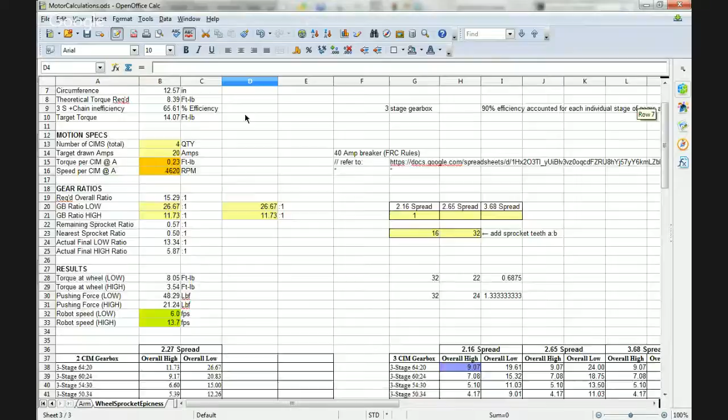Recreate this over the summer, but just for this demonstration I will use these numbers. I'm scanning through all of these so you can see what equations I have set up, and you're going to want these too. This is some more numbers that I had filled out before. So you can recreate this spreadsheet now, fix it, and use it for yourself.

Now, there was a big error that I had not noticed in the last part, which was these torque per CIMs at the amperage. That's what we use motor curves for. The more current we put inside the motor, the stronger it's going to be, and it's going to change how our motor behaves.

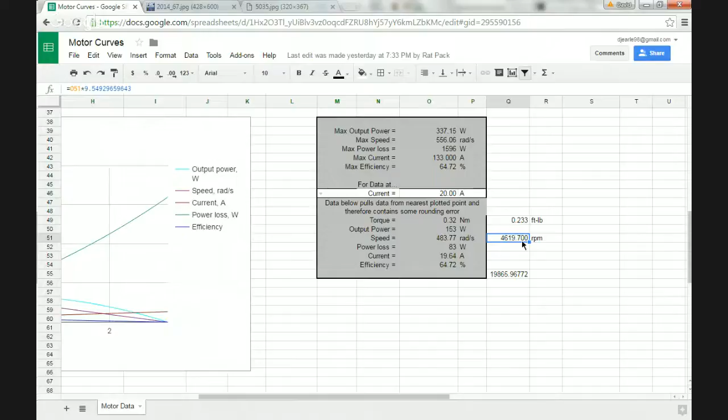We don't have to read directly from that graph though - this is computer generated, so we can get an estimate. So if we put 20 amps into one single CIM motor, we'll get 0.32 Newton meters out, or 0.233 foot-pounds, at 4619 RPM. So I took those two numbers at 20 amps and 12 volts, and plugged them in here - 0.23, 4620 - and that shaped our speed and torque, which should help shape this final number.

Now the other thing, give and take, is figuring out the sprocket ratios, the gear ratios and everything. These spreads are the difference in shifting between low gear and high gear - the ratio between low gear and high gear. So if we use this 2.16 spread, high gear will go 2.16 times faster than low gear.

However, these spreads are different depending on what gearbox you use. Let me go back to Vex Robotics. I don't have that tab up anymore. I just want to show you what I mean.

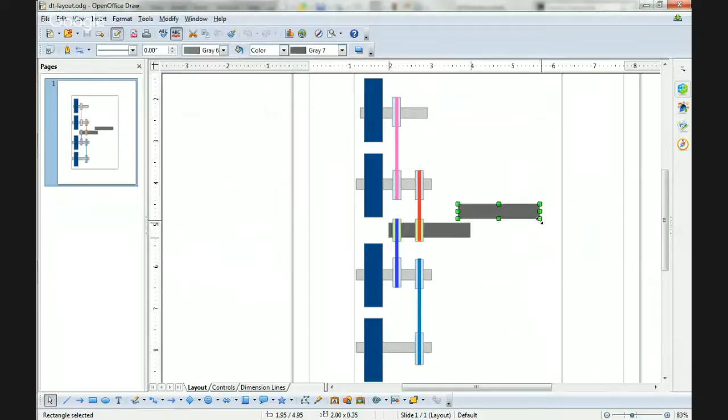These blue ones here are wheels. This dark gray one is the output shaft, which is what the motors are turning. The gearbox is behind this, powering that shaft, so you can imagine that as being the gearbox. That's where all the power is being converted from the motors. It's being slowed down significantly here, spit out at this shaft, and then slowed down even more between these yellow sprockets and these blue sprockets.

Now, small to big means each one of these wheels are going to be spinning slower than this, which means we get more torque, less speed, which is good for pushing. And we're already going freaky fast because our CIM setup is insane.

Each one of these lines represents chain, and you can see this layout needs to be very carefully thought through. Just as a side note, this is only half the robot. There would be this exact same thing mirrored on the other side, of course, so that we could actually go forward and turn.

Anyway, we have to very carefully understand how we're going to lay out these sprockets. This is a very standard way of doing it, putting 2 sprockets on the output shaft of your gearbox, running one to the right, one to the left, and then kind of daisy chaining this wheel to that wheel. So this wheel is driven by that, which is driven by this, which also drives this, which also drives that.

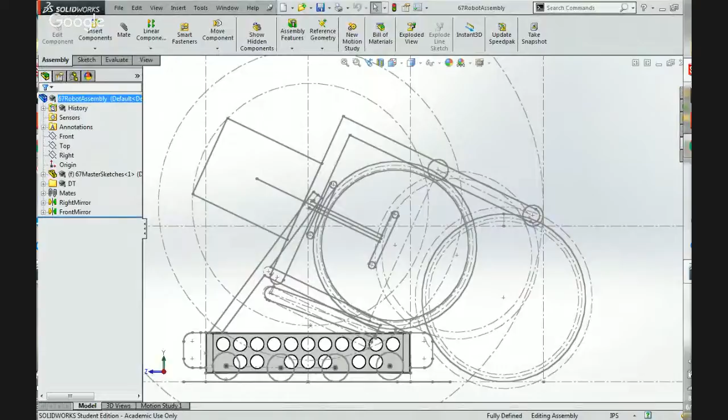So let's CAD this arrangement with these numbers, with this hardware and these sprockets. Let's put all of that inside our robot here. We've already laid out where the wheels are going to go, which is a good thing. So let's go ahead and download the CAD models for the wheels. We could CAD every single one of the components that we're going to use.

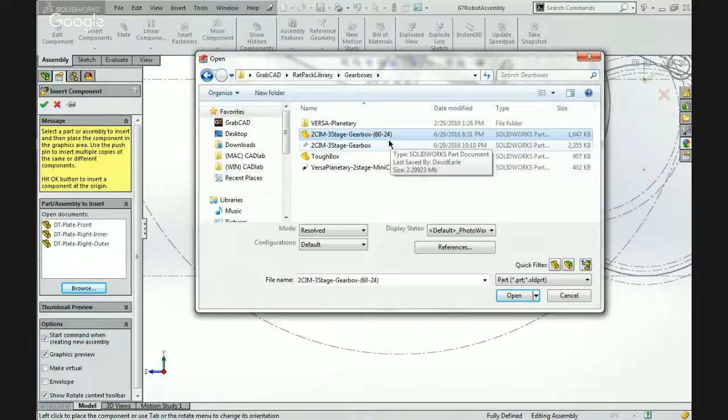We have specified the 3-stage version, the 6024. So we would download that STEP file. I've already done so, and it's already inside the GrabCAD CAD library, RatPack library. So what I will do is I'm just going to insert an existing component. I'm going to browse inside our RatPack library for a gearbox that is this 6024 2-CIM gearbox, 3-stage. Actually, hold on a second.

Simplicity-wise, that one was added in error. This gearbox is just the generic. The previous one had a specific gear ratio, and all the other parts were deleted. But this has every single gear stage. Let me just open this up so you can see what I'm talking about.

Here it is. If you download a CAD model and it comes in an assembly, you can save it as a part, and then it'll convert all of these into, instead of having them be parts, just individual surfaces, which is very, very nice. It lets you take a complex assembly and refer to it as just a part. Okay.

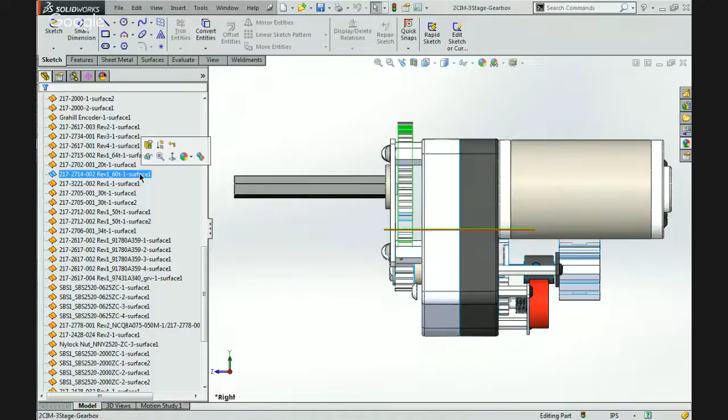So what you'll notice is that there are gears inside of gears here. So if I hide this gear, oh goodness. Oh, they were hidden before. But there are gears inside of gears. It's not like that mechanically in the actual model, but it lets us swap out the gear ratios inside the CAD model and custom tune it to whatever assembly we're using.

So currently this is the 20 tooth and the 64 tooth. And that's that. So you can swap out what gears you want to use. For instance, if you wanted the 34, you can show the 34 tooth, and it will pop it in your CAD model, and you don't have to change anything. This lets you make your assembly have greater detail. But I'm happy with this.

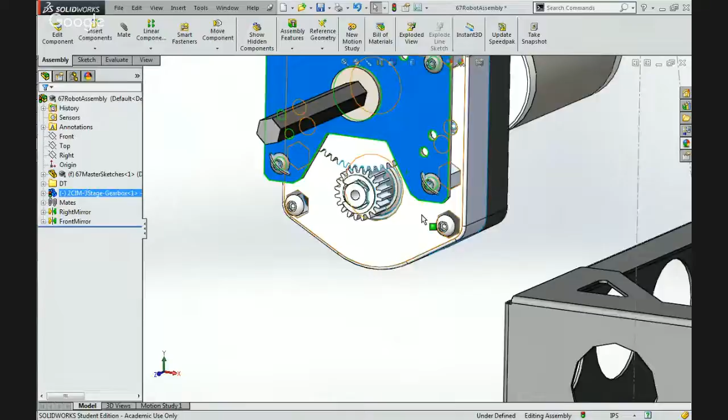These also come with a bracket down here. I've hidden the bracket. The bracket is used for mounting it to a flat surface, but we have a frame plate that we're using, and we're going to mount this front face directly to the frame plate, so those things will be coincident.

Then, for simplicity's sake, we're going to take the right plane of this assembly and mate that to the front plane of our robot. That way it's centered, forward and backward. And then the next thing is determining the height. How high do we want this to be?

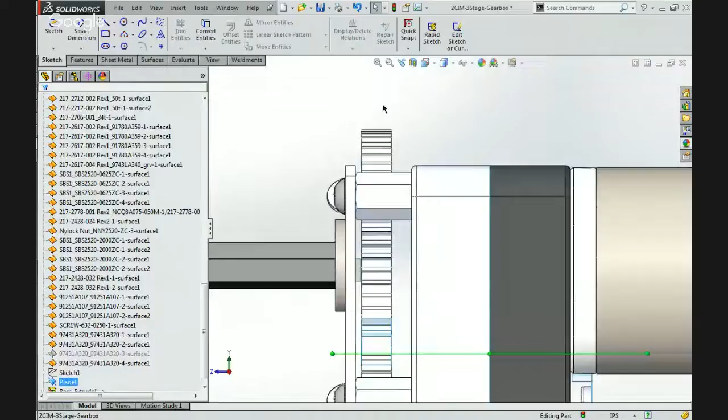So for that, I have constructed a plane that goes between the highest point of the, let me open the part so you can see how I defined it. So this plane goes through the center of the part from this tippy top point of the gear to this very bottom tangent part. All I did was make a sketch of a line from the highest point to the lowest point, made those coincident, added a midpoint, and then added a reference geometry plane.

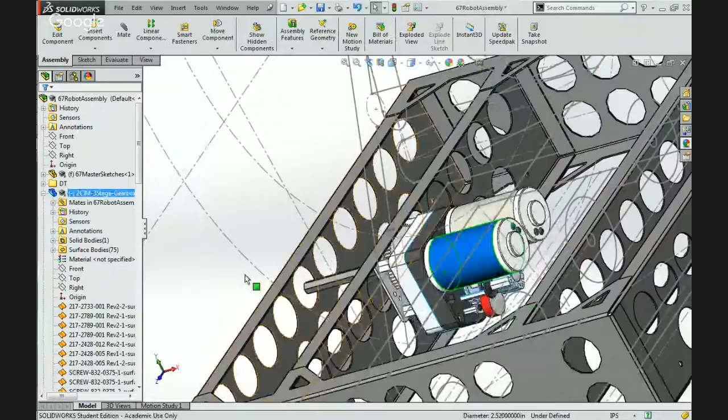Went to features, reference geometry, plane, and I added this, which takes the top plane, makes it parallel and coincident to that midpoint, and places a plane right through the center of our part. And so I can use that to locate it up and down. So I'll take that new plane that I created. Oops, that was a sketch. New plane, and the top plane of one of these parts. I want to do it to this one.

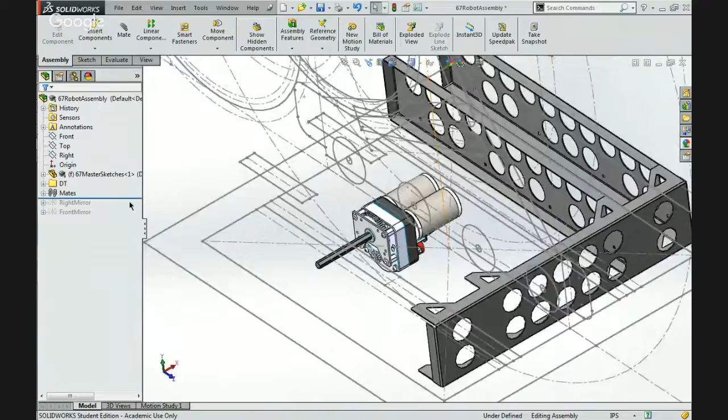Now, I did something a little bit silly: I took this gearbox and mated it to the mirrored side. It's best practice, as long as it's going to be symmetrical in the end, to mate all new components to a dominant side of the robot. That way you don't have components floating in space on the left. It's harder as the assemblies get more complicated. This makes your life much, much easier.

So since I already mated this fully in place, it's already fully defined, I'm just going to modify some of the mates that I added. For instance, this is no longer going to be true. It's not actually going to be mated to that face. It's going to be mated to this face, like that. If I flip the alignment, that's not doing any favors.

I'm gonna... I'll explain why you saw that shaft extrude extremely far. That's an odd behavior, and I'll show you how that happened. Parallel. I'm gonna flip this parallel. Whoops. Whoa, that was not my intention. Undid that. I think I did. There we go. That's better.

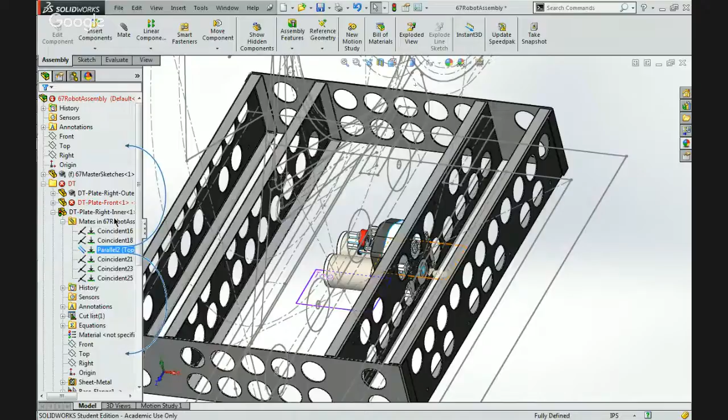Or is it not better? Did I mess it up or not? Okay, yeah, it's back now. Very good. It's this. Yeah, by doing that, I think I actually broke something. Or is it fine? I'm rebuilding. Oh yeah, that's fine. I just needed to rebuild the document. That constraint, this constraint, and that constraint.

So this one I'm going to flip. Nope. I tried that before, just in a different spot. What if I flip this one? There we go. That did what I wanted. So now the shaft, this is where the shaft comes out. It will be there.

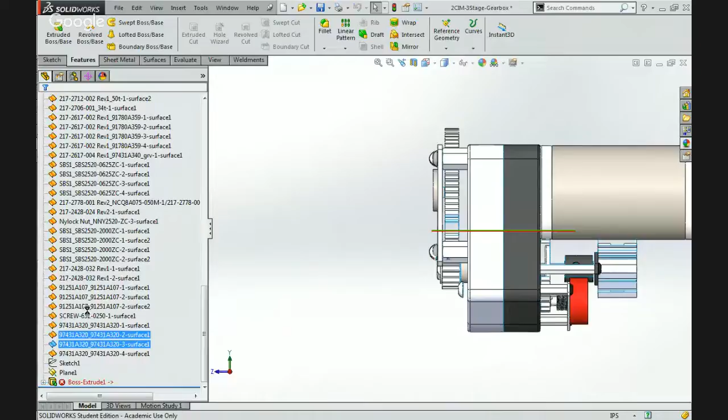Now, what I did, you know what? This is a part that I've worked with before. So what I'm going to do is I'm going to, oh, I can't. I deleted it. Okay, never mind. I thought I could show you something, but I can't. So we're going to do blind, and so this has a shaft that is somewhere around this length, right? It's a hex shaft, and it looks like that. It's actually significantly longer. I don't remember how long it is.

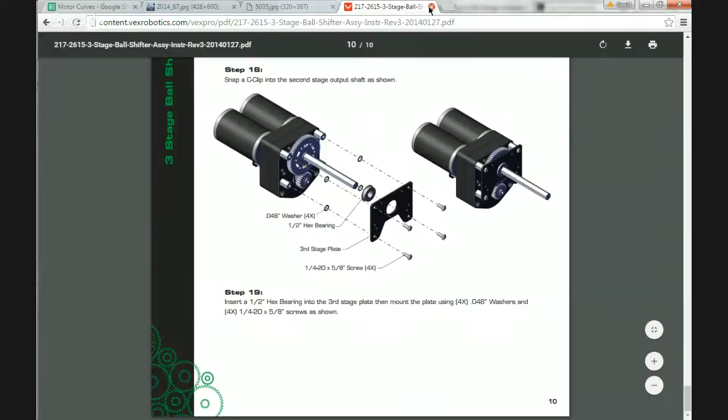Let's just take a look in the model. The model comes with a shaft already inside of it. If you get the long shaft, which is what we're going for, maybe if we do... I want to know how long the shaft is so I can put it in the CAD model. Well, I don't think they tell you here. This is just assembly. Well, the shaft is long. Not quite that long. That long. All right. That's just for representation purposes for now.

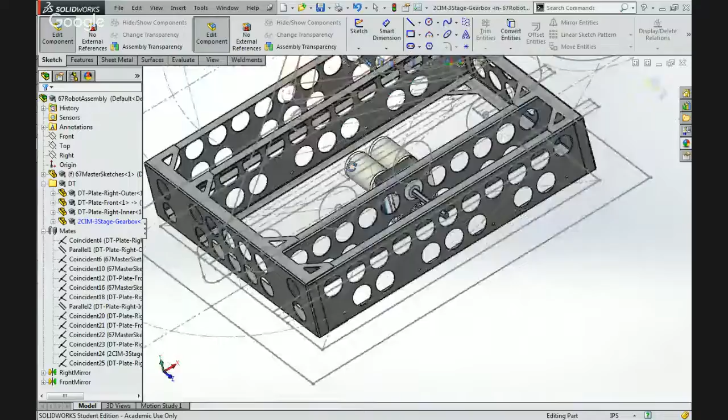Great. So we've got lots of space here, plenty of space for a wheel. It's actually somewhere around here, I think. I think it's 5 inches long, now that I see it in the context of a robot. Very good. So let's take on the next part of our drivetrain. And the next part of the drivetrain is going to be figuring out these wheels. I'm going to show you a really cool trick. It looks like we're going to have to create 3 different arrangements of wheels.

What we're going to end up doing is we're going to create a subassembly. We're going to create a new assembly, insert a wheel, insert a shaft, insert these bearings, I'm sorry, these sprockets. And we could make this one subassembly, and then this is the same subassembly as this one. This is different than this, right? It doesn't have this extra one. So we could save this assembly as and delete this part and then insert it.

Or there's a better way of doing it, and it's called configurations, where you can use one assembly like this and turn on and off components in specific instances in a major assembly. If you didn't follow that, don't worry about it. We're going to take a look. We're going to create it so you can really see. You'll get a sense for it once we start working with it.

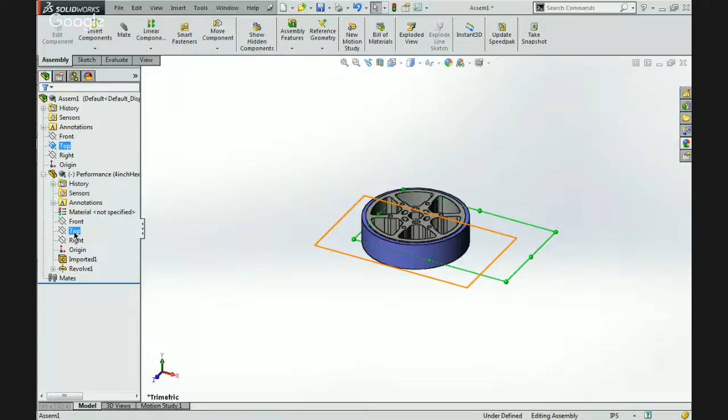I see that this is like laying down on the table, as if the top plane's the tabletop surface. I like to orient this always as if it's on the robot already. So what I'm going to do is I'm going to lean it up. I'm going to take the top plane and make it to the right plane so it stands it up. I think this is going to be flipped. I'm not entirely sure. And then top plane on the right plane, maybe. Flatten that out. And then lastly, front plane on. Front planes are shared. So there you go. You can see how that wheel's in there. It's important to note if you download a new one of these wheels, it doesn't come with this tread.

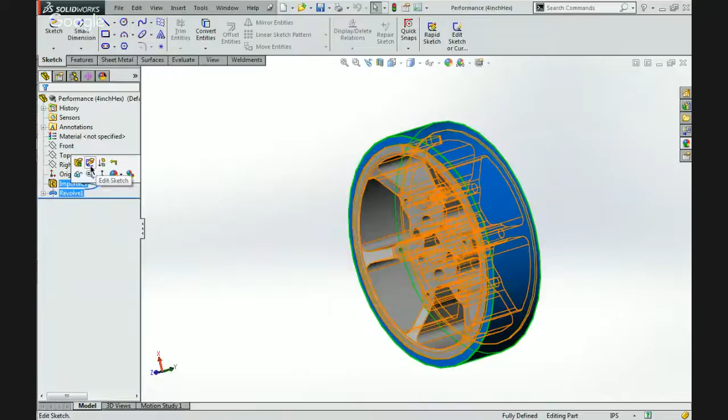A really cool thing that you can do with newly downloaded models, this is what you'll see in a downloaded model: you can actually add your own geometry to the model. So you can always add to it. We'll cover that.

What I would do here is add the tread, because currently the outer rim diameter is 3.6 inches. The tread makes this a 4-inch wheel. It doesn't get to 4 inches until you add the tread. So I did a revolve extrude on a sketch that was on the right plane, and the sketch is of a rectangle that looks like the silhouette of the tread. It's 0.2 inches thick, and it's revolving around that line. It just revolves all the way around.

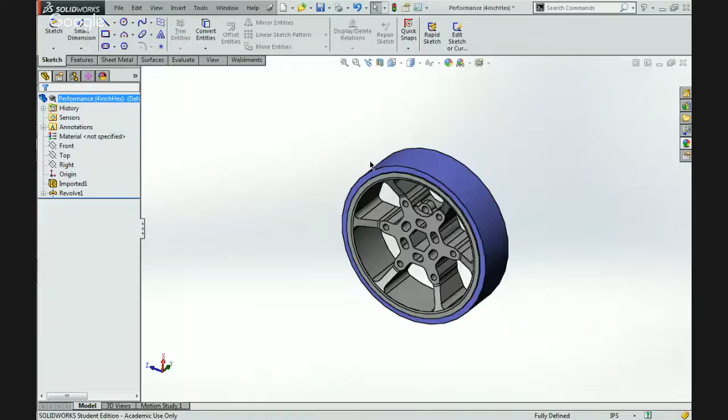You're taking that one rectangle and sweeping it across the entire thing and adding material as you go. And now you can see the outer diameter of this wheel is indeed 4 inches, just like we had intended. So we'll go back to our subassembly here. Let's add some more parts.

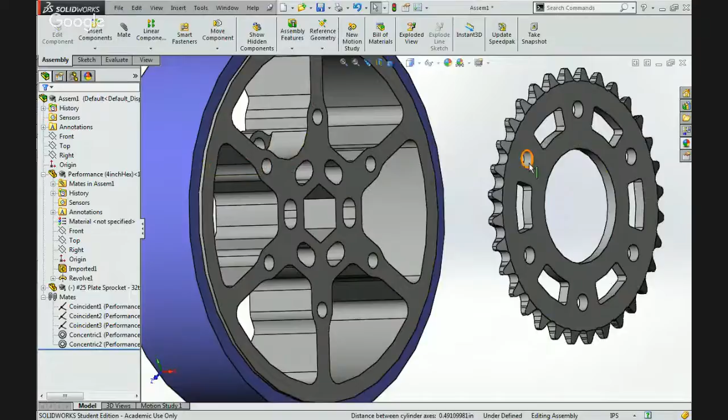Now, we're going to make that concentric so that this is centered on the wheel. We're going to lock the rotation by making one of these holes concentric with one of those holes. And you can see we can set it as close as we want to the wheel itself. But we don't want to get too close because chain has thickness. Let's figure out how thick the chain actually is.

Just as a good resource for you, McMaster-Carr has fantastic documentation on a whole bunch of mechanical solutions. You can just see all of the things that they have. It's almost endless. But if you don't know what something is called and you're just trying to figure something out, this is a great place to browse through their library, and you can find things really fast. Anyway, we're looking for roller chain.

25 roller chain. We're only working with speed, not too much with torque in this game, so we're probably not going to be popping any 25 chain anytime soon. If we were really in big push matches, we could upgrade it to a 35 chain. But you can see here with 25 chain, McMaster has a SolidWorks document that you can download of these few chain lengths, and you can get critical dimensions, like the width of the chain from pin end to pin end is 0.3 inches.

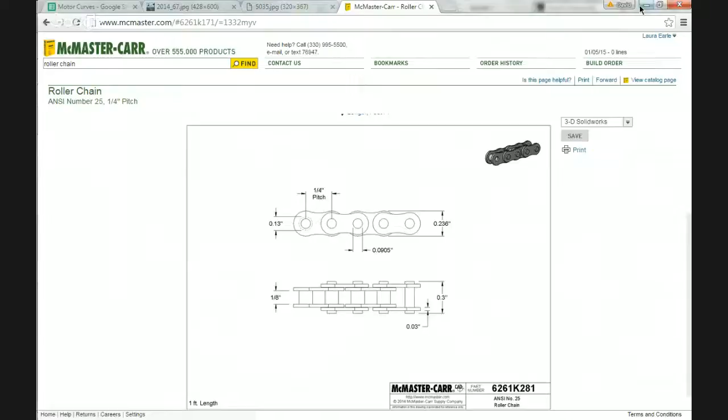So whatever we do, we want to make sure that our chain, which is 0.3 inches, is never going to rub up against the aluminum wheel like that. If it gets too close, even though technically this isn't rubbing up against it, we have to have some sort of assembly tolerance. Luckily for us, we don't have to think too much about that, because the lovely people at Vex have already done a fantastic job, and they have created things called Versa hubs. I don't have them logged correctly, they're just under hubs.

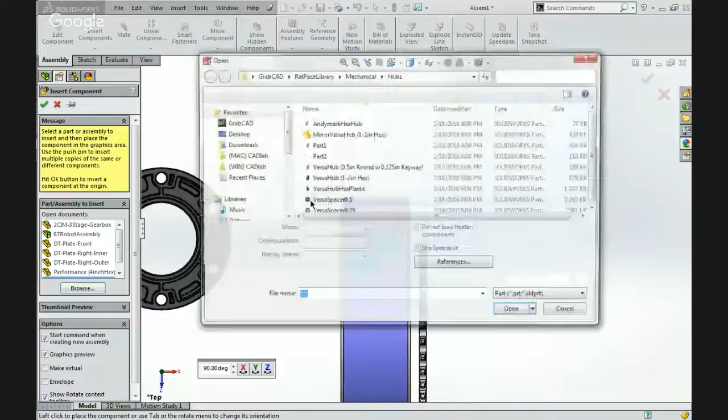But let's take a look at these Versa spacers, half-inch, or not half-inch, that's a lie. Browse, I want the quarter-inch one. The half-inch one you can use for 35 chain, the quarter-inch one you can use for 25 chain. So these are injection molded plastic pieces, and their entire function is to be a spacer. So what you do is you make it concentric with your thing, and you can see the hole pattern. Sprockets have a receiving pattern for this peg, and these pegs fit perfectly inside, and it's got the hole pattern that lines up and everything.

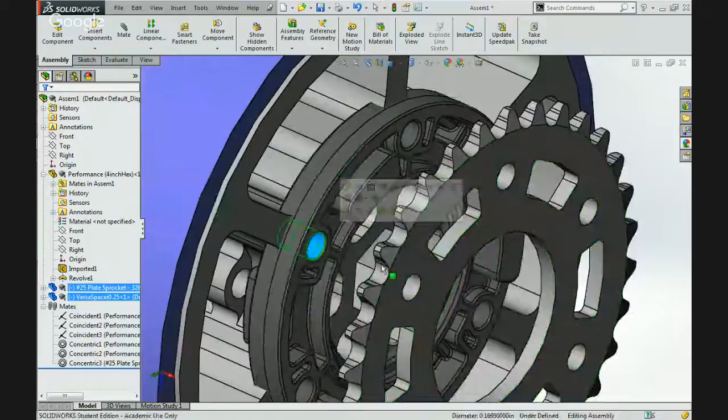So what we can use this for, I'm just going to constrain this in space here for just a couple. There we go. So how we can use this is as a spacer between the sprocket itself and the wheel. So instead of cutting 6 individual spacers that may or may not be the same length and getting a wobbly sprocket, we can simply place this directly onto our wheel. Push it in as far as it can go, and we get proper spacing and then some for our chain.

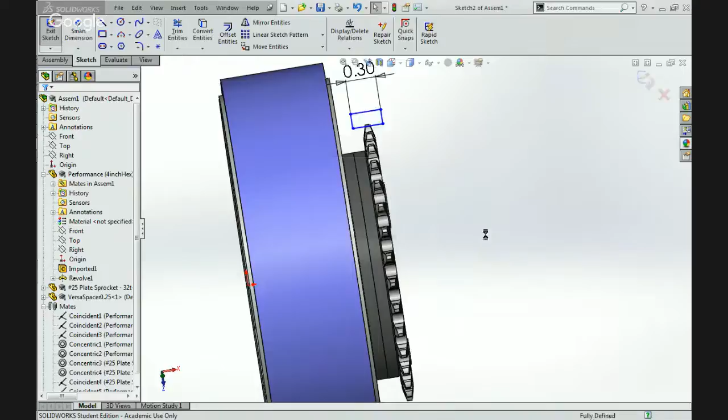So for instance, if we wanted to see the width of our chain again, 0.3 inch chain. If it's centered on the sprocket just like that, we've got plenty of room over there. It's nice. These hubs save you a lot of effort, a lot of grief. Very good. Now, this subassembly needs 2 sprockets. So what we'll do is, let's just do a linear pattern.

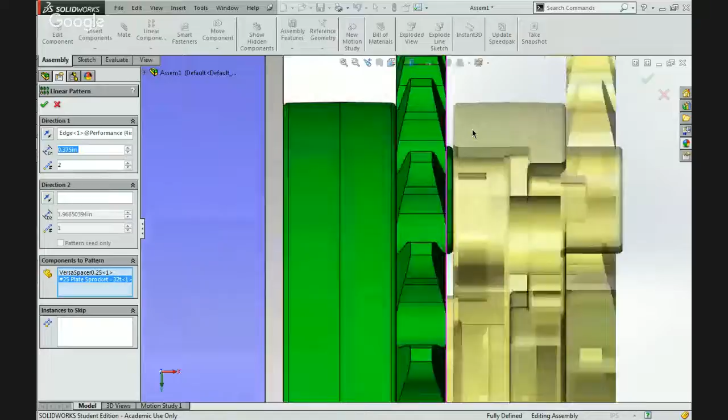We want to take the direction of going this way. That's just generally the direction that we're going. We're patterning this and that, and we're having 2 instances. The space between them, between pattern, shouldn't that just be half inch, quarter inch? I'm sorry. Yeah, quarter inch. Right? Or is that not right? No, that's wrong. Looks like it might be 3/8. Something like that. It's fairly close.

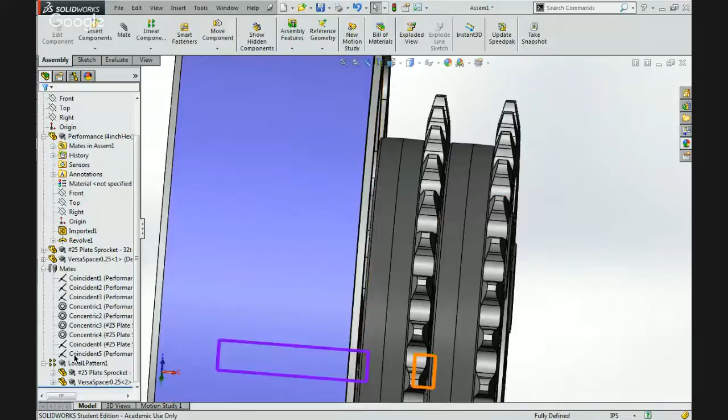What we can do to firm that number up is take the distance between the inside edges of these two, and we see that the distance between them still is 0.15 inches too big. So I'll just come back to this pattern, subtract 0.15 inches, and it's 0.225. But that was 0.015, not 0.15. My bad. Yep, that's a slight difference. Minus 0.015, not 0.15. That's better, 0.36. And now you can see that it's just touching. Holes go all the way through. Look at that. That's 2.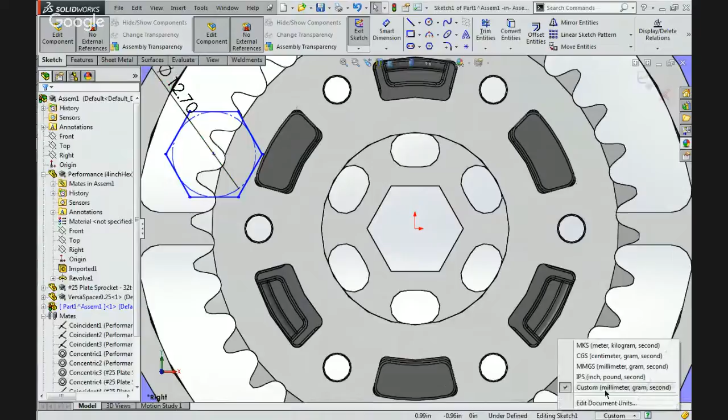And I don't want to make any references on this, and I'm going to say that's horizontal, and this is 1/2 inch in diameter. I'm going to set the inches. Perfect. And take that sketch that I just made, extrude it to be, I don't know how long that's going to be, so how about just 5 inches for now. I just realized I made a goofy mistake. I constrained it over here in space, but forgot to do the critical point because I was changing units. Just brain fart. Forgot to put this thing on the origin. There we go. So now take a look at this. Look at that. There's a shaft that gets the job done.

We're going to run into a couple of things as we're putting this robot together. But for right now, let's just keep this the way it is. We're going to come back and modify this shaft a bit. I'm going to name that shaft while I'm at it here. I'm going to name this axle. And since I'm doing the naming scheme of custom parts have DT if they're in the drivetrain, I'm just going to add that custom naming scheme. And let's go ahead and save everything.

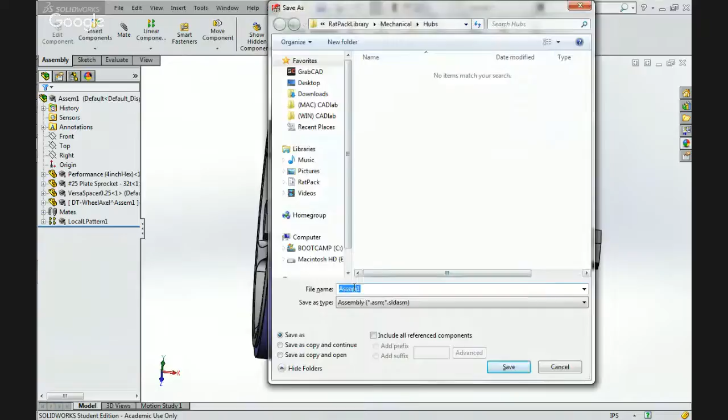Now I have to save this entire subassembly. So I'm going to jump out to CAD Lab, put it in advanced, and we're going to say this is DT wheel sub. And the part that we inserted, I want to make sure that that is saved externally as DT wheel axle, which is what I just named it over there. It's going to be saving right next to it. So we'll hit OK. This goes from assembly 1 to DT wheel sub. Great, let's go back to our full robot assembly.

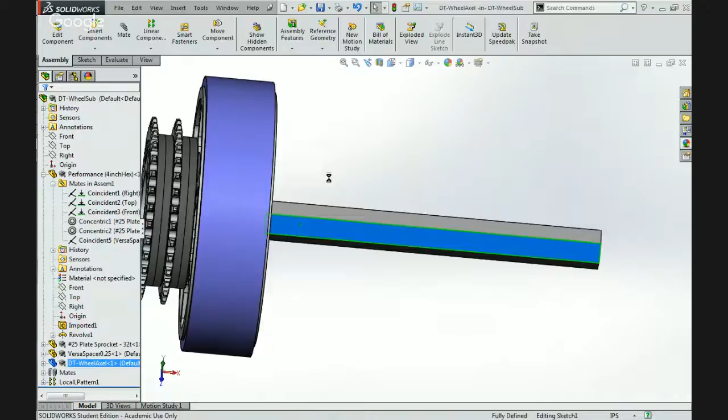And let's insert that new wheel subassembly. Here it is. Here's our wheel subassembly. Looks like I made that in backwards on the plane. You could just flip it in this orientation, but it's cleaner for me to understand how things are mated if I just simply flip that mate alignment. And while I'm at it, I'll just reverse that thickness. Cool. There it is. What I've done is I just moved it to the other side.

So what I want to do is this hole here is going to be a clearance hole for a 1/4 bolt. A bolt is going to fit inside this hole, and it's going to thread into the end of this shaft. So we're going to make a hole inside this shaft on either end. Make a hole. That's a circle.

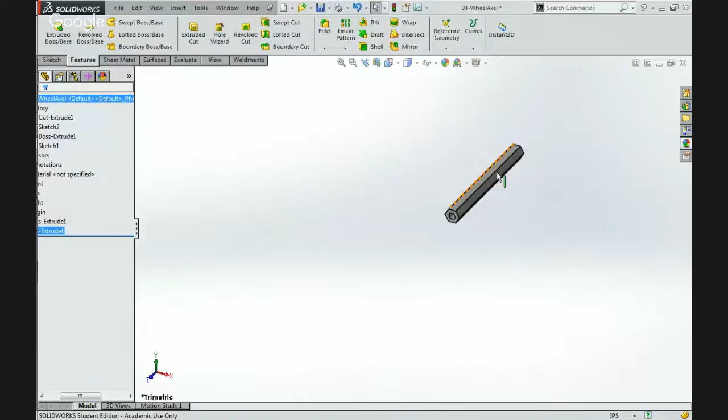And extrude that. Oops, that's a positive extrude. That's adding material. I want to take material away. Extrude that through maybe 1.5 inches. That would give us room for a 1 1/4 inch long bolt, which should hold the wheel on.

Then I'm going to mirror that hole to the other side, and I'm going to need a plane that goes in the middle of my part. So I'm going to put that there, and take this, mirror it across that. There we go. Look at that. We got a hole on both sides now.

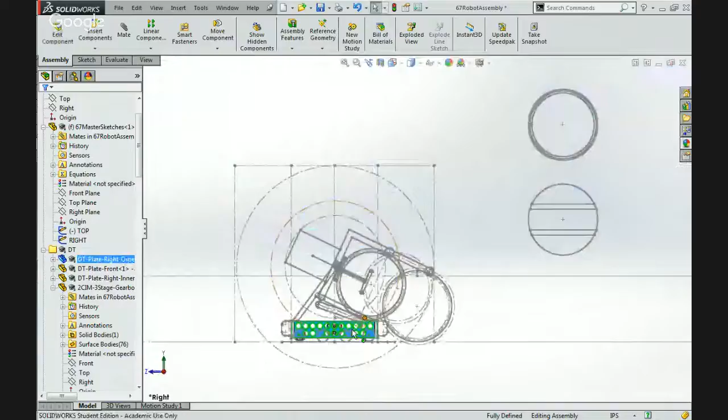So I can mate that hole to that hole. So now they're concentric, and the wheel, let's see, is lined up with the sketch that I've made before, because the hole that I just mated concentric to inside this plate, that location of the hole was defined to this master sketch.

So because the shaft was mated concentric with the hole, and the shaft is concentric, and the wheel is concentric to the shaft, the wheel is going to be concentric with everything. And it all lines up. Everything is concentric with each other, making sure all those logic streams are in place.

Now, the only thing is this can move in and out, and it can also still spin. So to take care of those things, let's just take the top plane of this and mate it parallel to the top plane of the assembly. That keeps it from spinning.

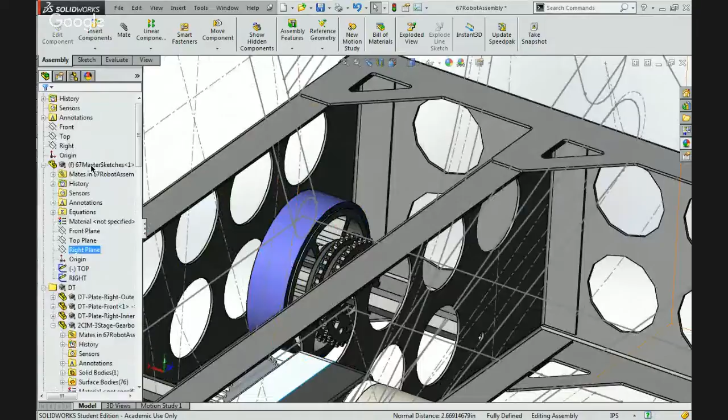And we'll take this front face, and we'll mate it so that it touches. It's being clamped up against the inside face of that. So you can see how it locks it inside of our robot drivetrain.

Very good. But uh-oh, we got interferences. You can see how the wheel is crashing in to our edge flanges here and this gusset. So we're going to have to modify those in a bit. But we can solve one of these interferences with this by moving the wheel inwards, closer to the inside of our robot. So let's do that.

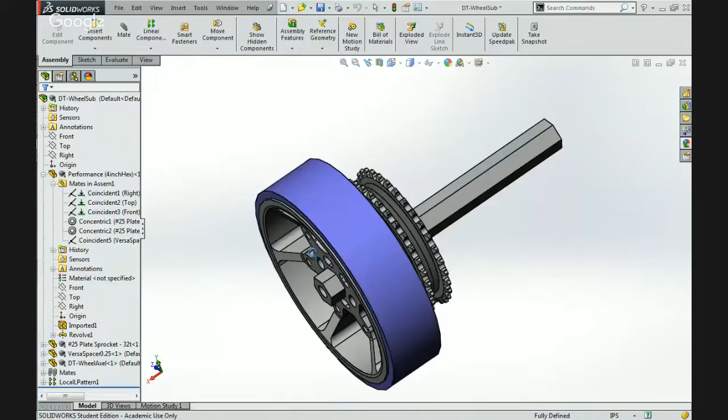So relatively, by moving the wheel closer to the center of the shaft, in effect, we're taking this end of the shaft and we're extending it longer. You can kind of see how relatively this face is getting farther away from that face.

Reason why I'm bringing that up is this wheel isn't going to move across. This is centered on our work planes, on our assembly planes, and this is not moving. This is the thing. The wheel is constraining everything else. So what we're going to do is we're going to move the shaft left instead of moving the wheel right.

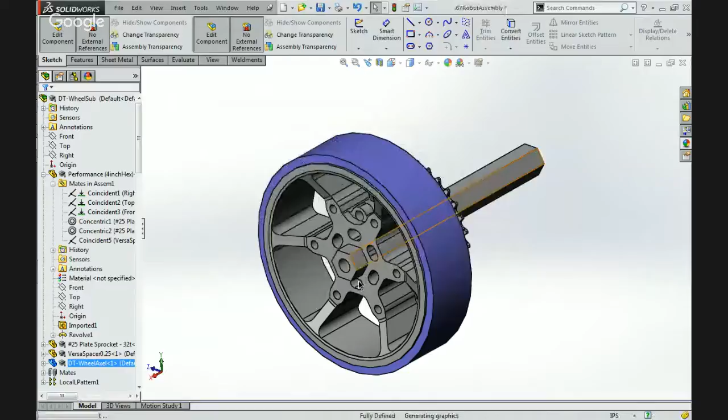Now the shaft is extruded this way, so we can add a second direction and just say 1.5 inches is good. I think that's a good number. So if it was 1.5 inches on the left-hand side, you can see how that'll push our wheel away from the edge. So that's very nice. Now it's quite a bit of space, but I think that'll be good for us. That'll make sure that there's plenty of space.

Now we also want this face to mate to that face. Currently there's 1 1/8 distance between them. If we tried to mate these two together, it would try to push this plate outwards or it would try to squish the shaft together. But the plate's already fully defined and the shaft is already fully defined. So we're going to need to change the length of the shaft.

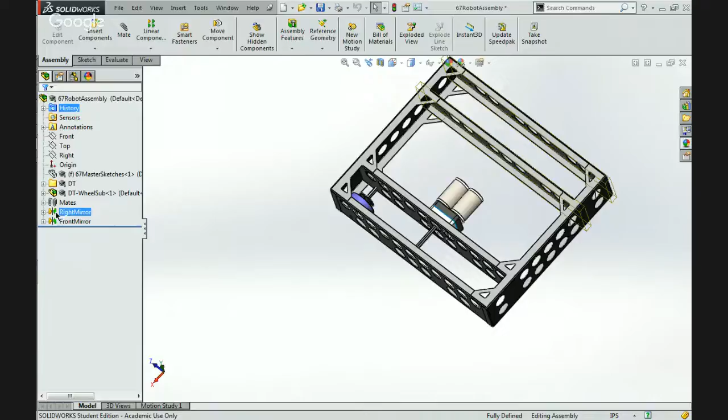But when we zoom out a bit and we think about the problem in general terms, hold on, let's see. There's actually a better way of showing you why this is important. Let's edit this, bear with me for just a second, and edit this mirror. Let's just mirror that gearbox to the other side. Yep, just what I thought.

Look at that. Look how close our CIMs are to each other. In fact, they are interfering with each other. So currently, this is not buildable. We're going to need to move these two gearboxes closer to the ends, to the edges of our drivetrain, because this is not going to package.

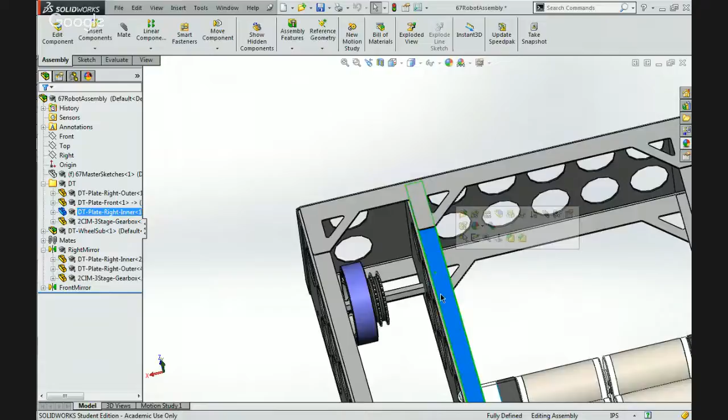So in effect, what we really need to do is get this frame plate as close to the wheel as possible, or as close to the sprockets, really, is minimize the distance between the sprocket and the wheel and the frame edge. So the way we've constrained it is that the frame is actually constrained location-wise with this top-down sketch.

So you can see here there's this line here. That line represents the inside edge of our, represents that face. That line represents this face. So if we move that line closer to the left, it'll modify the spacing of the three-dimensional part.

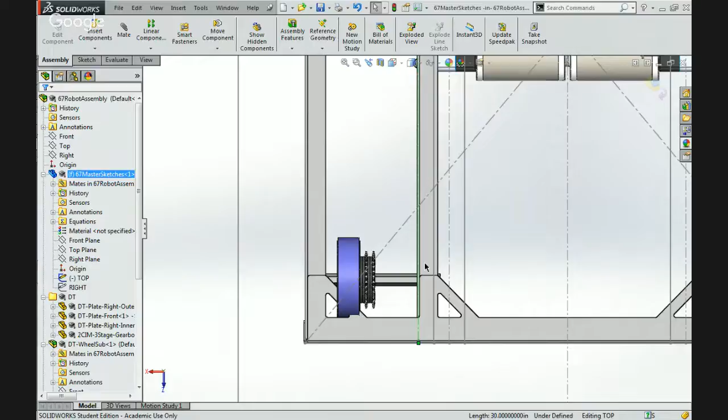How much? So we could go in here. Currently, this line, this part here, we want to bring to the left, and it's arbitrarily set at 5.5 inches. We could set that to 3 inches if we wanted to. It'll bring this over, and you'll see here this plate is going to update.

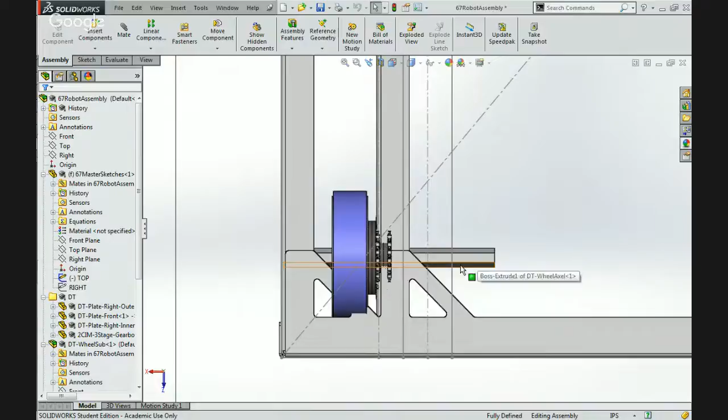Moves over. Oh, but that's definitely not enough space for this. We're going to need to make sure that we find some sort of magical number.

Then on this side, instead of making it arbitrarily 5 inches, we could do an offset from surface and say go beyond that surface by maybe 2 inches. Like that. So now you can see here, this to that is 2 inches away. If our sprocket, if we decide to add a third sprocket, we'd need to make sure that this face is always 2 inches away from the outermost sprocket. So now the length of this is 5.07 inches.

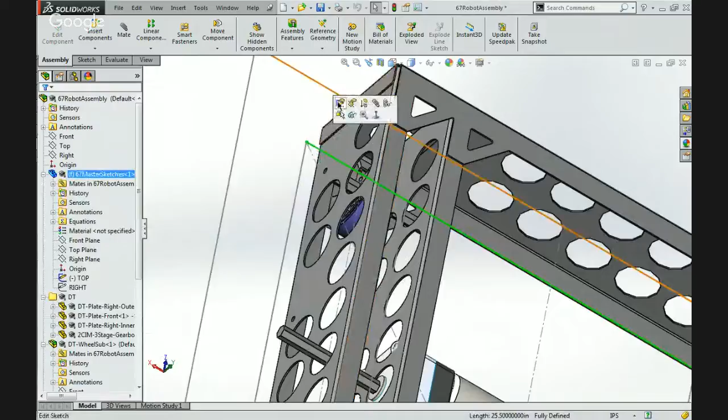That is the magic number we've been looking for this entire time. So what we could do is we have 5.07, that's the length of this thing. We could go over here, edit this sketch, and we could say this 2 inches that we set before, or 3 inches, is going to equal 5.07.

There's a downside to this way: what if something changes in the future? What if it no longer is 5.07? What if it needs to change and we forget to modify this number again? We can make this parametric, meaning that the distance here is going to be dependent on something else, dependent on another variable.

So bear with me here and just follow what I do. What we're trying to do is get the length of this part into this sketch. So we're going to create just a smart dimension that's not even in a sketch, just create a smart dimension. It's 3-dimensional, and that gives us this read-only. You can't edit it. This is just an annotation, 5.07. It's going to tell us how big it's going to be.

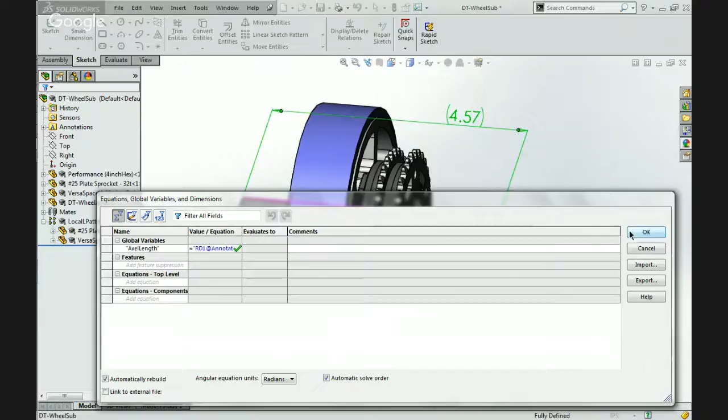For instance, if we wanted to change this to 1.5 on this side, it's now 4.57. So that's good. And then we're going to create an equation, a global variable, this is going to be axle length. That's going to be a variable, and it's going to equal whatever that number is. So if this number changes, then the axle length variable will change.

Back in our assembly, what you'll find is that inside of our wheel subassembly, there is now an equations folder, and there's axle length, 4.57 inches, that new number that we've defined. This is the variable that we can reference.

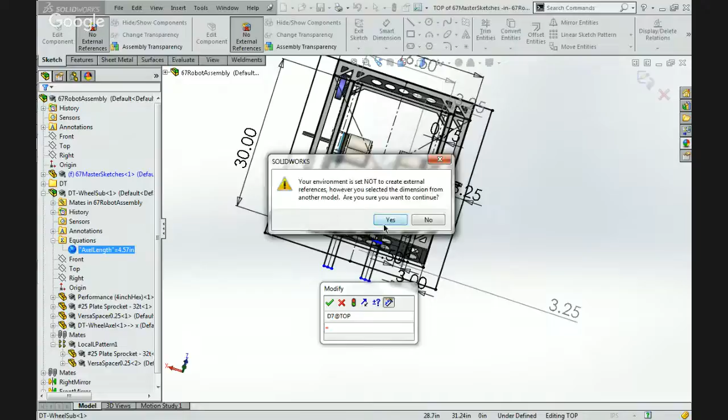For instance, if we go into the sketch now, this 3 inches is no longer going to be an arbitrary 3 inches. It's going to be a very specific whatever axle length equals. So we're just going to say equals, create an equation, so we'll always look at this. I had no external references checked. But now what it's going to do is take this, whatever this axle length equals, and push that number to this sketch. So now you can see 4.57 appears here too.

And now there's going to be a center distance, or the distance between the frame plates, is going to be 4.57 inches. They've moved. Uh-oh, looks like we're poking through. So that means something's off a little bit. You can see here that the inside, between the inside plates, it's 4.445 inches.

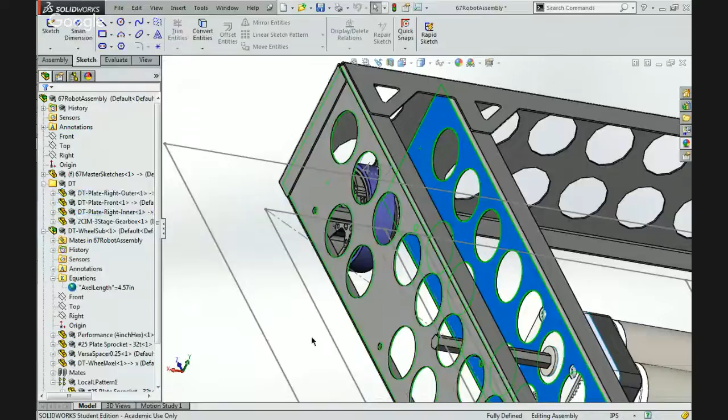No, the reason that is, that's because of the way this is defined here. 4.57 is from the outside edge of the robot to the outside edge of this aluminum. So that means there are 2 thicknesses of frame plate that it's subtracting from this number to get to the inside width. So what we really need to do is compensate for that and just say twice the thickness of one plate, or 0.125 inches plus 0.125 inches plus the axle length.

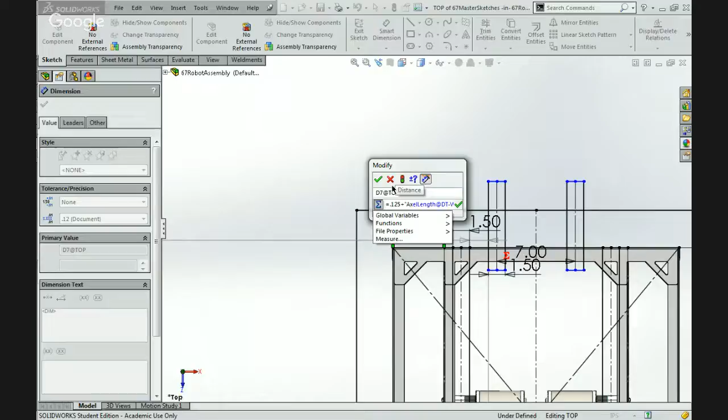That increases this number a little bit. But what you'll find, after it updates, is that the inside distance—that's what's really important—this equals 4.57 now. We just had to jump through a hoop in order to get that distance to be 4.57, which is what we were after this entire time.

That all depends on how you set up your file. So now, look at that, it's no longer poking through.

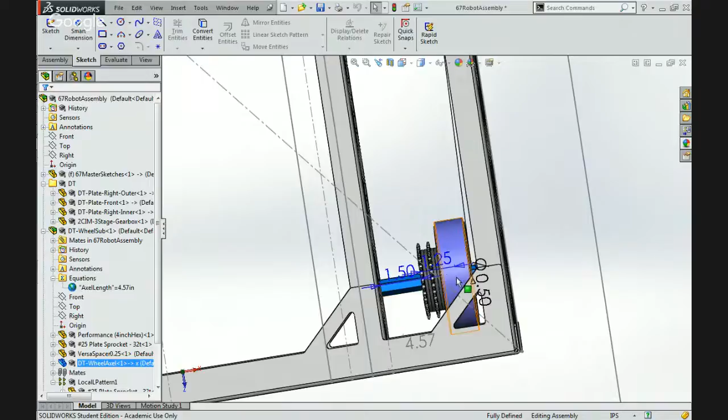Now the really neat thing about this is that there's a hierarchy of what's most important. What's most important is that there is 1.5 inches between the edge of this sprocket and the edge of the shaft, and 1.25 inches from the edge of the wheel to the edge of the shaft. That defines the center, and that defines the distance between these plates. So you can see how the hierarchy of what's most important comes really into play.

So now we can just double check how much space do we have between the wheel edge. We've got 0.3125 inches, and I think that's a good number. But we've got one more interference, and this is a very tight area up here too. We're going to have to get rid of that.

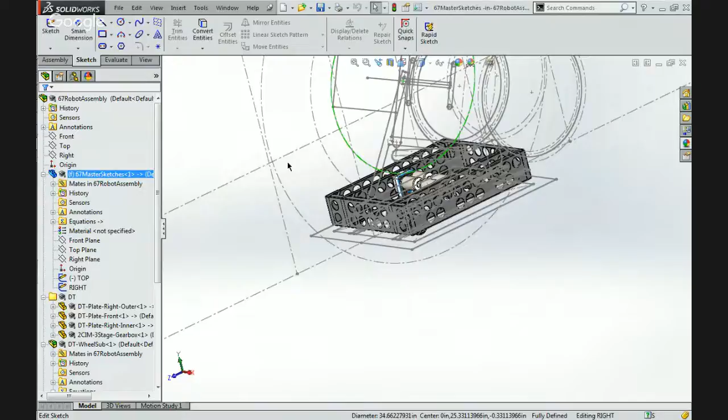Let's take care of that first. That's easy. Let's move the wheel to the right a bit so that it's not so close to the frame edge. We can accomplish that fairly quickly by opening up our sketch, our side profile view sketch, in all of its magnificent complexity and simplicity and elegance.

Currently, I have this 1 inch distance from the tip of the left tip of the wheel to the outside of the frame. But that's not exactly what I'm talking about here.

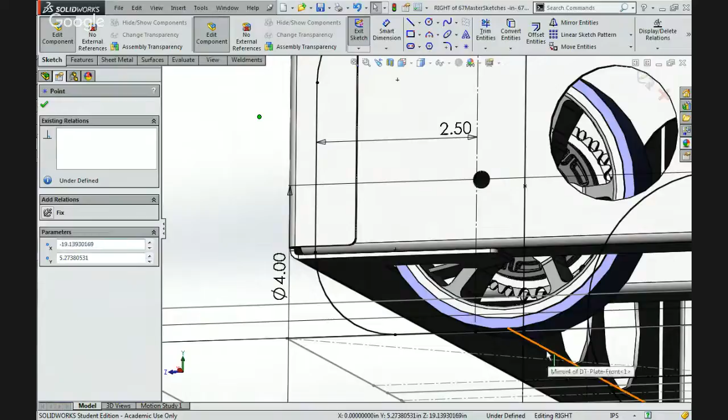What I'm more looking at is I'm looking for a point that intersects with this line here. That line is the upper edge of that bottom plate. That same line extends to what this is super close to. So if I take both of those things, what you'll see is this line actually skewers the sketch plane.

It's perpendicular to the sketch plane. So there's the sketch and there's the line. You can see how that's going between it. We've got this point placed in on the sketch plane, and there's no coincident. You can't make this and that coincident because SolidWorks isn't projecting this line, and it doesn't even see a point.

But what you can do is you can make it pierce. And what pierce is going to do is it's going to move that point until it intersects with the line at the sketch plane. So now that point is on the sketch plane and on that line at the same time. That's what the pierce function does.

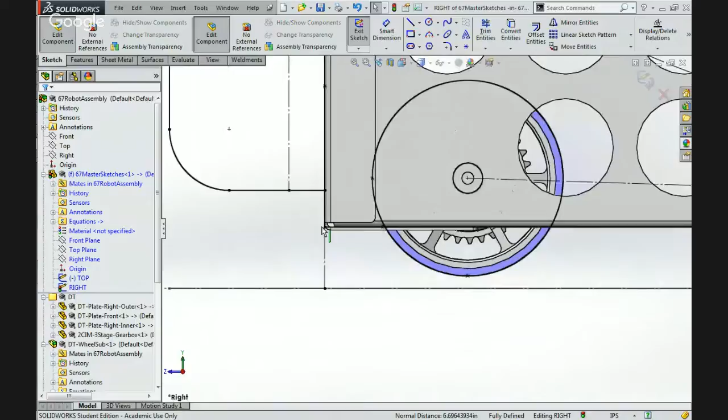And so we can see for sure now that this is very, very close. So I still want 1 inch between the wheel and that point. This is the point that I'm trying to space our wheel against. So I'm going to take this smart dimension. It's no longer going to be from the edge of the outside of the part, it's going to be to that point that we just defined.

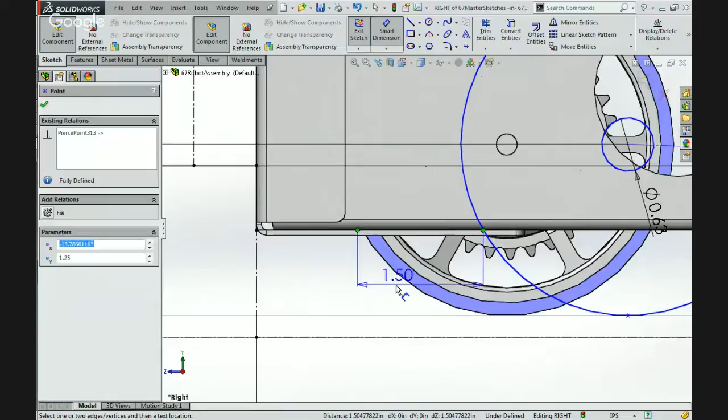Let me make a new smart dimension. I'm going to bring this wheel inwards a bit. I'm going to also bring this point down so that it intersects, so that it's coincident with the bottom plate, essentially horizontal with this point here. That way, the closest the wheel is ever going to get to that edge is going to be whatever the smart dimension is. We'll just call it 1 inch.

Goodness, my computer is getting slow. That's all well and good. We will call that a day. So what we've done there is we've very smartly defined where the wheel is going to be left and right relative to that edge of our frame.

Look at that, everything is updated. We can see that the wheel hole and everything has changed. Everything is updated and it's super nice. Great. Now the next thing, this is going to be a little bit more tricky.

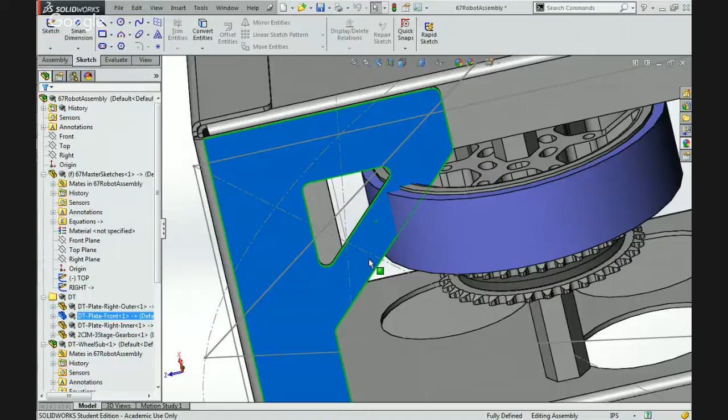This gusset here needs to go away. It's not worth trying to figure out some fancy geometry to get the wheel and the gusset to live peacefully next to each other. The gusset's just going to go away. It'll survive. We've got gussets all everywhere else, including on the top. So we just want to get rid of this bottom gusset, that bottom triangular bar.

So let's open up that part. I believe that's going to be on the mirrored side. So that's the actual edge flange, and this is the mirror. So we're going to want to modify, we're trying to get rid of this gusset and that gusset together. So I'm going to make a new sketch, and I'm going to take a rectangle, just pop a rectangle on there, like that.

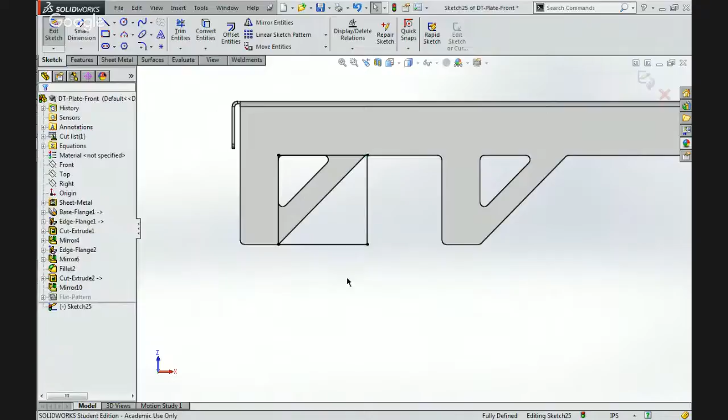There we go, and I'm going to extrude that. Actually, before I extrude it, I'm going to mirror that to the other side in the sketch. Mirror everything over there about this. There it is. Now I'm going to extrude cut that.

Not going to go all the way through. Going all the way through would cut this one away too, which is not what we want to do. Instead, what you can do is do a blind cut and link it to the thickness. That way it'll just cut through the thickness length.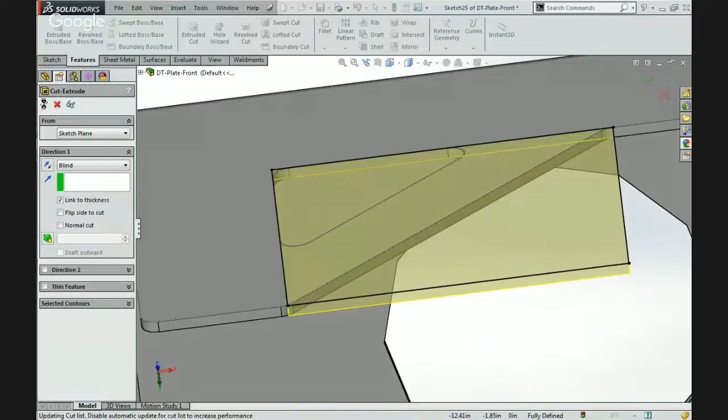There it is, it's gone. I noticed that this—oh gosh, pivoting around is weird—that this fillet got a little bit funky. That's because we chopped away a significant portion of the fillet.

So you can see there the fillet was there, and then we chopped part of it away. So what I'm going to do is take that same fillet and just drop it underneath. Oh, can I not drop it underneath that? Okay.

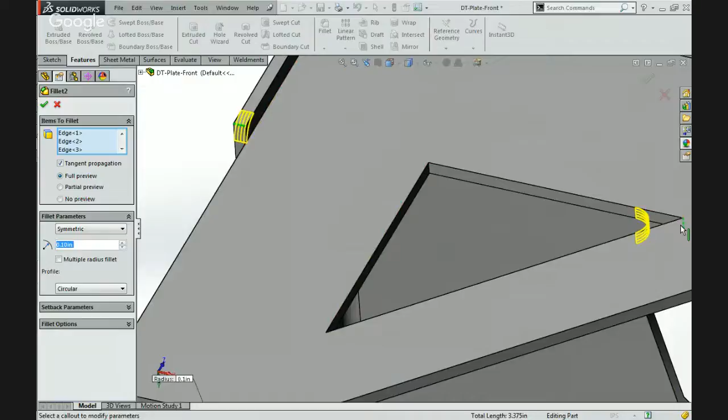What we're going to do is deselect the things, the edges that have disappeared, the edges that we've destroyed with the cut extrude, because it won't let us rearrange this—rearrange the fillet to go underneath—unless those edges are no longer externally referenced.

Chicken and the egg thing. Or I guess it's not that at all, actually. Very clear which one came first.

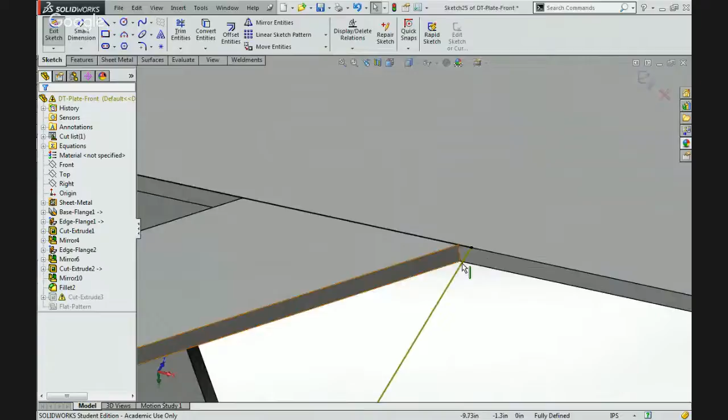Oh, this is referencing the fillet. Well, I guess we had to do that anyway, just joking. What I was explaining before didn't exist. I made a constraint to the fillet to define the length of that, and it really just needs to go to that point now that the fillet's not there.

Now we can bring the fillet underneath, which means we can fillet these new edges that we've created with the cut extrude. Then we'll come over here. Just like that. Very nice.

Now when we look in our subassembly or in our full assembly, look at that. Our wheel is now free and clear of any objects that might get in the way of it turning.

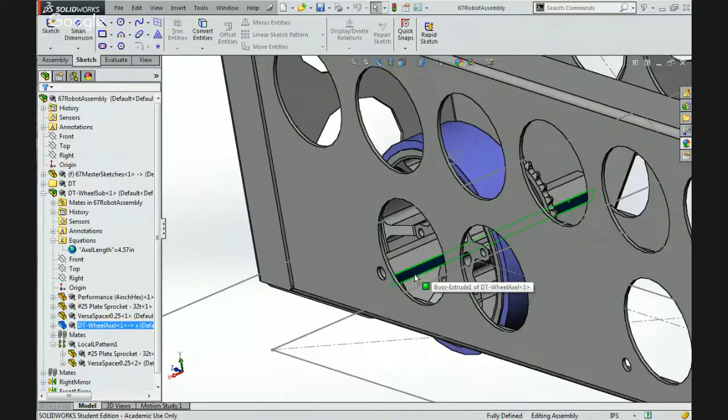As I say that, though, there is one big issue with this wheel subassembly so far. That issue is this bar here, this our axle, is not going to turn. Its purpose in life is to not turn. It's just there as a stabilizer to hold onto the wheel. It's just the axle, it doesn't spin.

But the wheel we chose mounts rigidly to the axle and it expects it to turn. The result is that the wheel is not going to turn very easily. So what we're going to do—I chose the wrong wheel. AndyMark makes another kind of wheel that doesn't have a hex bore. It has a round bore that is designed for a bearing. So we'll put a wheel that can receive a bearing on here instead.

Now I have that already in my CAD library, the RatPack CAD library. So I need to essentially replace this wheel with a different part. I don't have to delete it though, because deleting would mean I'd have to insert a new component and re-add all of the mates attached to it.

Instead, I can just replace it with File, Replace. Say I want to replace this component with just the regular 4-inch wheel, and say check. And it's going to try to reattach all of the mates again.

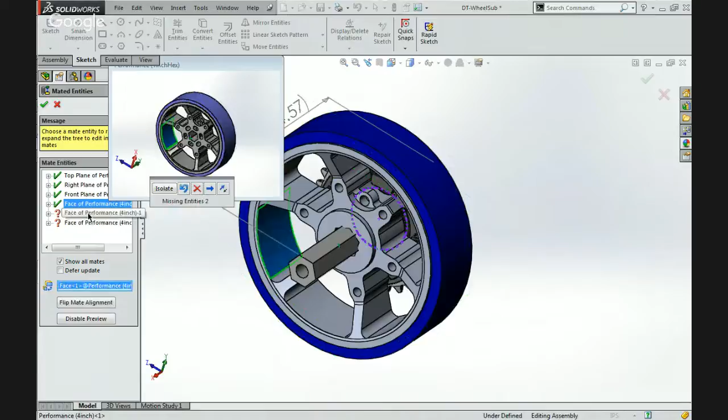What face is that face? That face is that face. What face is that face? That face is that face. And it just attached all of the mates again, and I didn't have to do hardly any work.

Now it looks like the local pattern just got broken. That's because we referenced the direction as a part of the wheel. But I guess we don't have to do that. We can reference this edge instead. All we're looking for is the direction that goes across there.

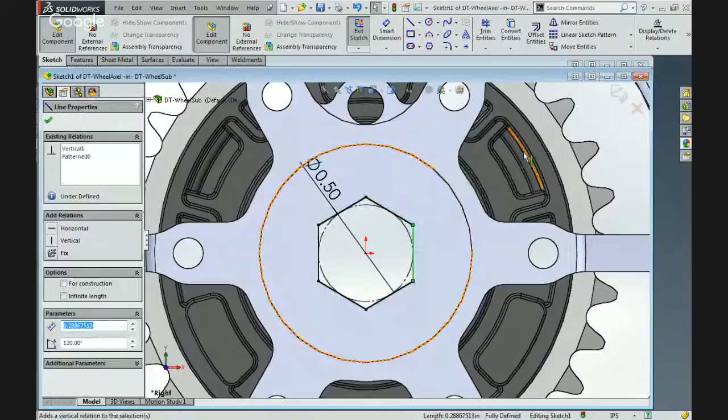Awesome. I'm OCD, and I see this madness. I could try to rotate the wheel, or I could just rotate the shaft, and so I'm going to rotate the shaft. Okay, there we go.

There we are. Now there's a bearing that's going to be set inside the wheel on just this side, and then we're going to set another bearing, just a second bearing, on the sprocket itself. So let's insert a bearing. Mechanical bearings, bearing hex 1/2 inch. We'll take that and this, make them concentric.

We want to make sure that the flange is going to be on the outside and this base gets tucked inside the actual support of the bushing, of the sprocket. So I'm going to flip it around. And then that face and that face are going to be flush against each other.

Now there's another cool thing that you can do here. Currently this bearing can spin around still. It's not defined. You can actually take a concentric and you can lock rotation. And wherever it is, it just arbitrarily locks it in place and it won't be able to rotate. That's handy sometimes when things really don't matter.

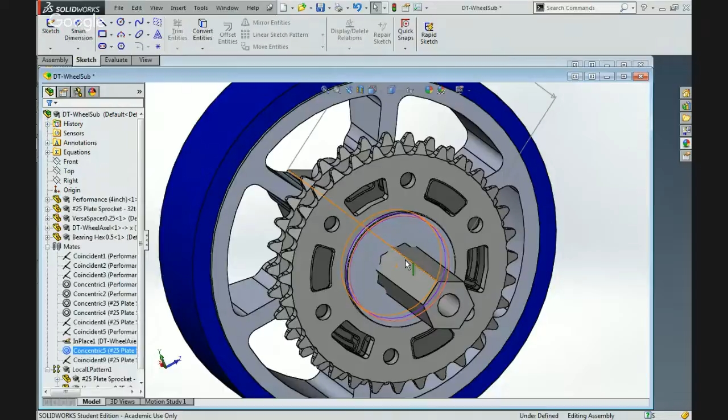But since I'm OCD, I'm going to make that face and that face parallel to each other. That way it lines up very nicely and we don't have any CAD interferences. I'm tired of looking at this 4.57. I'm just going to turn that off. These are annotation views. You can turn on and off annotations. Okay. Look at that. I'm going to turn off annotations again. There we go. That is a really nice looking wheel.

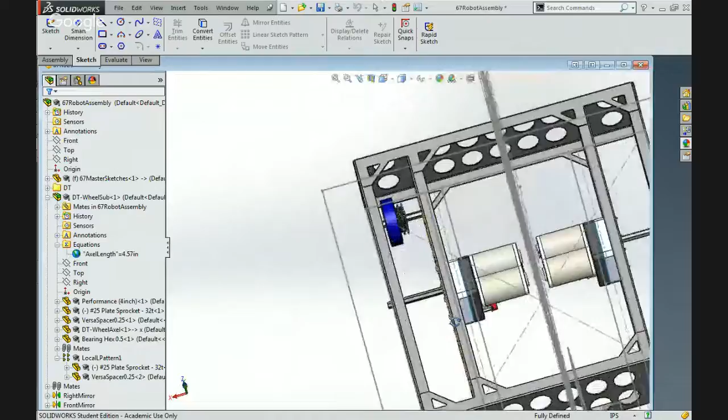Now, next thing is let's insert the rest of those wheels. You might think that we want to linear pattern this one wheel to the next, to the next, to the next, but I remind you that if we look at it from the side view, this wheel is actually hovering above the ground. And this one's touching the ground, and that one's touching the ground, and this one's hovering above the ground. So it's actually not in a straight line.

I noticed that the tread on this wheel is set as 1/4 inch, not 0.25. I'm OCD, so allow me to correct that. There we go, much better. So now what we're going to do is just insert a second one of these. It's not going to be too much work. Whoops. That would be inserting just the shaft. I want to insert the entire wheel subassembly. There we go. So now I've got a complete separate new assembly.

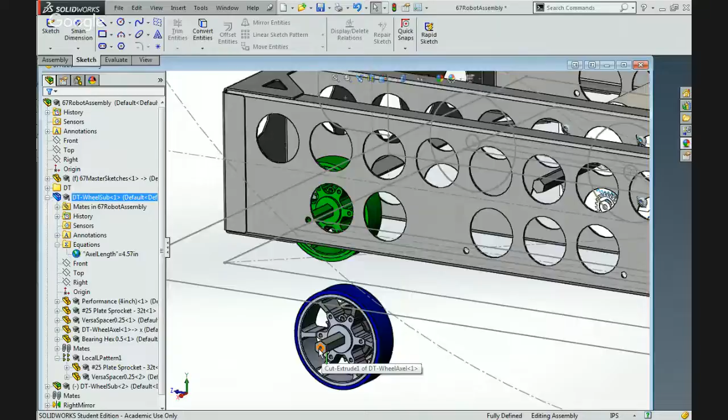I'm going to make the inside of that hole concentric to the inside of that hole. I'm going to make the top plane of this to the top plane of that. Not coincident because they're not the same height. I'm going to make them parallel. This one's higher, this one's lower.

And then lastly, I'm going to make the right plane of this one coincident with the right plane of that one. They're in the same robot side to side location. That's fine. But there you go. Look at that. Now we've placed that second one. Let's mirror this to the other side. So on our front mirror, we're just going to click, click. Look at that. Now we've got 4 wheels on this side.

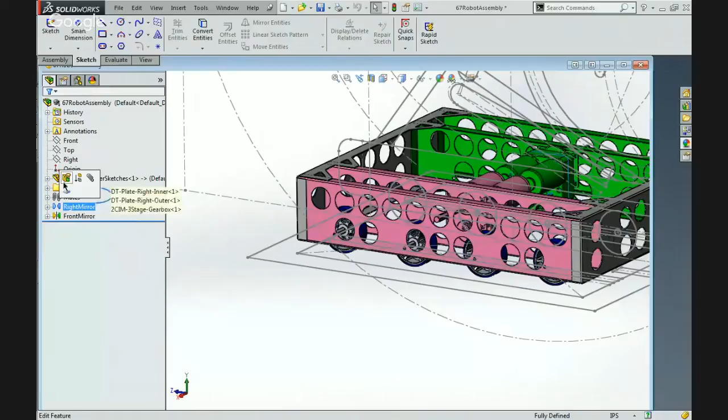And then in our right mirror, we want to move those to the other side. Let me just show you here. When we enter the right mirror right now, look at that. These guys don't appear anymore. We just see those. That is because the right mirror occurs first and then the front mirror occurs.

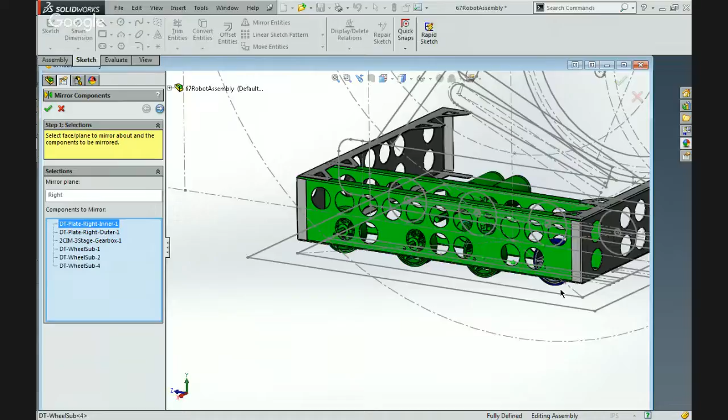If we want to, we can put the right mirror underneath the front mirror. That way the right mirror can reference the front mirror, but the front mirror can't reference the right mirror. That's the hierarchy thing. What comes first? The front mirror comes first in this case. We just rearranged it. Now we can click every single one of these like that, and it'll mirror it to the other side. Now we've got all of our wheels.

But we're not quite done yet. It's looking really good, but we're not quite done yet. Because as soon as my computer starts thinking, there it is. Look at this. This has one sprocket on the left, this has one sprocket on the right, this has two sprockets. All of them have two sprockets right now.

So before I gave this complicated, long-winded description of how we're going to do that really elegantly, we might be tempted to replace these with save-as modeled versions. Just save this component as, and delete the right-hand sprocket. But that's not the most elegant solution. There's a better way of doing it.

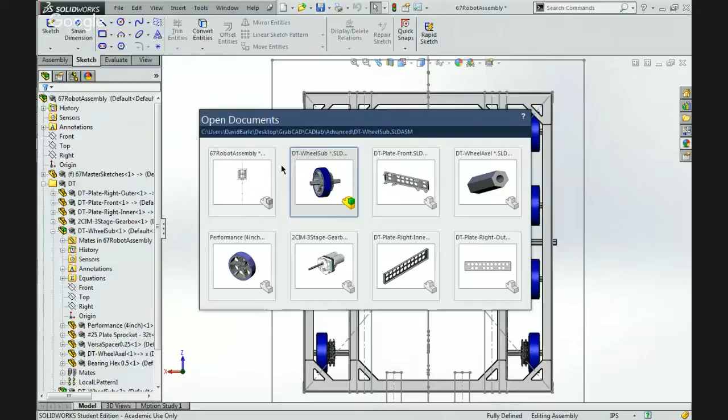Check this out. This is your tree tab. This is your property manager tab. This is your configurations tab. This is what we're looking at. This is for appearances if you wanted to know too. But configurations is what we're going to be looking at. This is the default or the go-to. This is the standard that has every single component visible.

Let's just rename this for simplicity to 2-sprocket, because we have 2 sprockets in this view. And we're going to create another configuration. Currently, it doesn't look any different, but we have to tell it how it's going to be different. We're going to suppress the one that we don't want to see in this version, like that.

And we're going to have to create a new bearing. You can't change mates around. You can only suppress and unsuppress components. But you'll see why this is awesome in just a second. Doing that. Cool. There's that. That's 1 sprocket, wheel side.